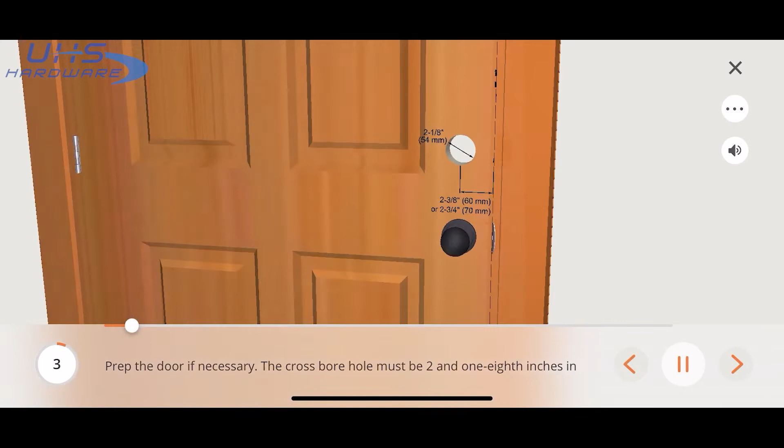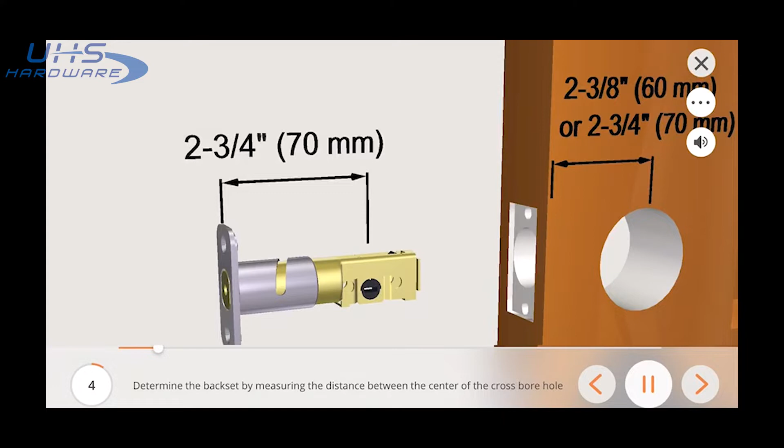Prep the door if necessary. The cross bore hole must be 2 1/8 inches in diameter. The edge bore hole must be 1 inch in diameter. The backset should be 2 3/8 or 2 3/4 inches. Determine the backset by measuring the distance between the center of the cross bore hole to the edge of your door. The deadbolt, J, has a default setting of 2 3/4 inches, 70 millimeters.

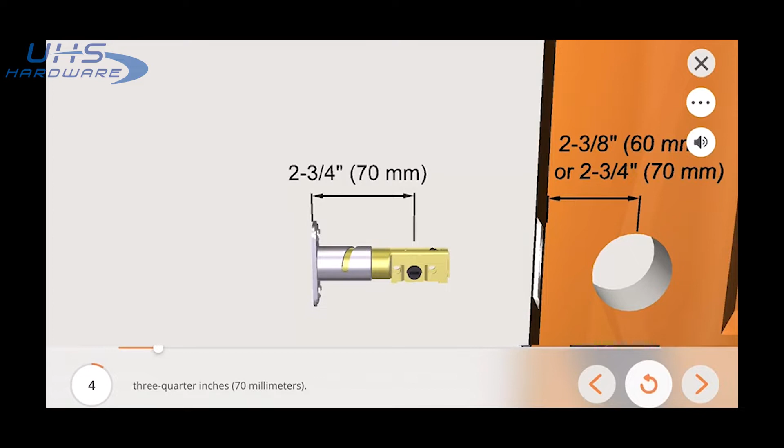If the backset needs to be adjusted, first extend the bolt by moving the crank towards the face plate. Adjust the backset to 2 3/8 inches, 60 millimeters, by rotating the bolt and the bolt face plate counterclockwise, and pushing in. Note, a flathead screwdriver may be used to turn the cam slot to extend the bolt.

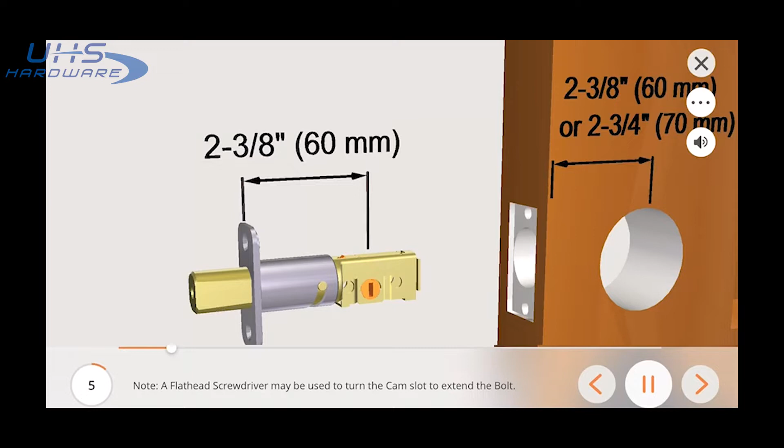Insert the deadbolt into the edge bore hole. Make sure that the deadbolt is right side up. Fasten it to the door with 2 screws, K.

Before you peel off the covers on the adhesive strips, check the exterior assembly alignment to your door hole and deadbolt. Before placing the exterior assembly on the door, make sure the torque blade is in the vertical position.

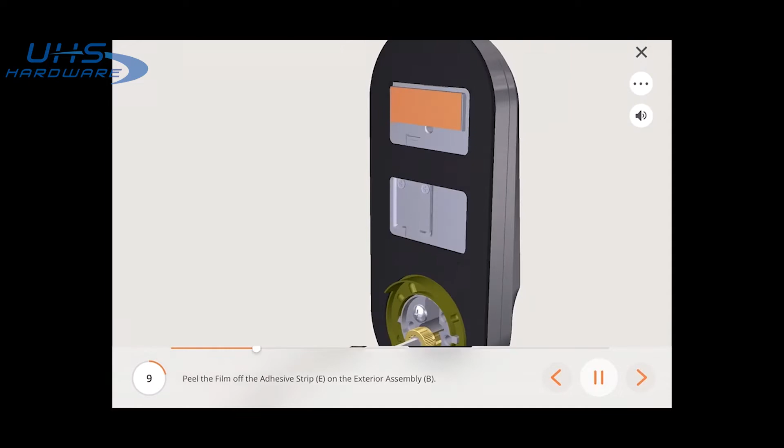Peel the film off the adhesive strip, E, on the exterior assembly, B. Make sure the deadbolt is extended. Place the exterior assembly on the door while inserting the torque blade into the vertical slot of the deadbolt and guide the cable through the cross bore hole under the deadbolt.

Check the mounting plate alignment to your door hole before you peel the cover off of the adhesive strip. Peel the film off of the adhesive strip, E, on the mounting plate, D. Place the mounting plate on the interior side of the door. Guide the cable through the opening near the bottom.

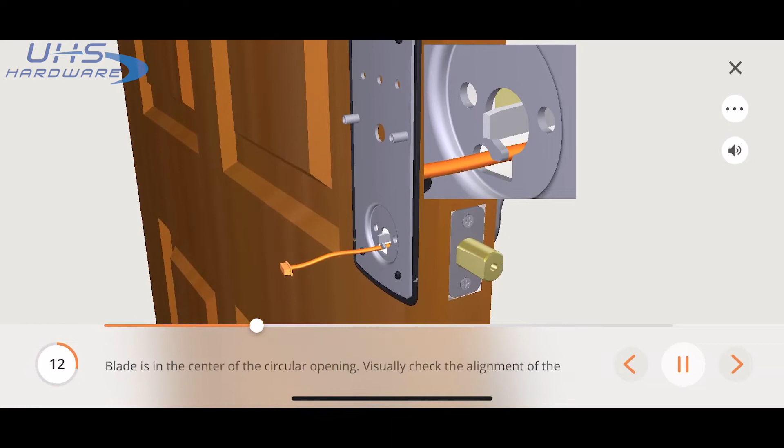The mounting plate should be placed such that the torque blade is in the center of the circular opening. Visually check the alignment of the mounting plate through the screw holes on either side of the circular opening. Route the cable through the slit connected to the circular opening.

Without using any tools, insert 2 screws, F, into the holes on either side of the torque blade. Carefully turn the screws by hand clockwise to catch the threads correctly. Turn the screws counterclockwise and make sure they are not cross-threaded and turn smoothly. Repeat if necessary and use caution.

Once the screws have been inserted correctly, make 5 turns clockwise by hand. You may now tighten the 2 screws, F, until the exterior assembly and mounting plate are secured to the door.

After securing the mounting plate, use the keys, A, to ensure the deadbolt locks and unlocks smoothly without any binding. Do not forget to take out the key before the next step. Note, leave the deadbolt in the locked position before removing the key.

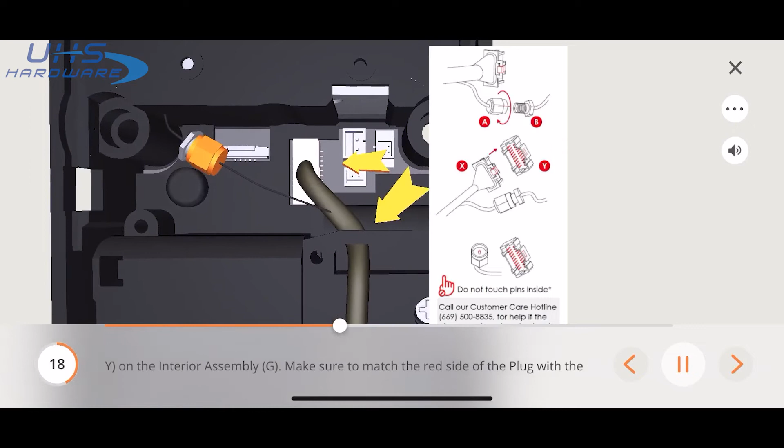Tightly insert the larger cable, X, coming through mounting plate, D, into the socket, Y, on the interior assembly, G. Make sure to match the red side of the plug with the red side of the socket as shown. Tuck the cable under the eyelet hooks and route to the right of the interior assembly, G.

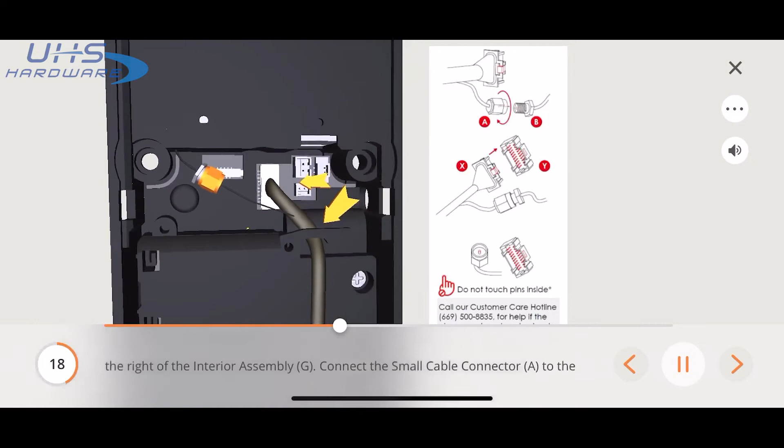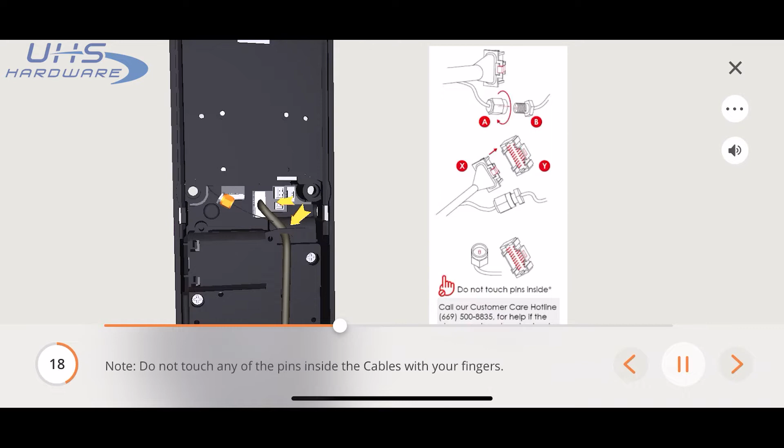Connect the small cable connector, A, to the small cable connector, B, by tightly screwing them together by hand. Note, do not touch any of the pins inside the cables with your fingers.

Place the interior assembly up against the mounting plate. Make sure the torque blade is inserted into the thumb turn. Secure the interior assembly to the mounting plate using 2 screws, H.

Place the ribbon and insert 3 included AA batteries into the inside row of the battery compartment. Press and hold the program button while installing the 4th battery until you hear a beep from the Lockly.

The keypad screen will start and initiate the self-check to determine if your Lockly is a left open or right open door.

Manually lock and unlock the door by using the thumb turn and key to make sure the deadbolt moves smoothly. If you feel like there is a tight tension while you are turning, it means that the lock may not have been installed straight. You will need to click here and go back to the step where you installed the deadbolt.

Swipe your hand across the touchscreen keypad, the lock will close. If the deadbolt bounces and unlocks automatically, it means the lock has been installed incorrectly without the deadbolt extended and with the torque blade inserted vertically. Click here to return to the step with the torque blade.

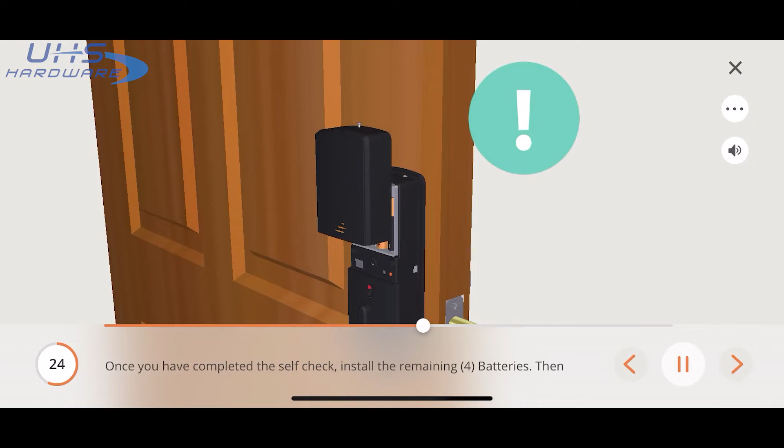Once you have completed the self-check, install the remaining 4 batteries. Then install the battery cover to the interior assembly and fasten the battery cover screw.

Make sure you have cleaned and wiped down the door. Remove the film from the back of the wired sensor, P, and attach it to the edge of the door. Once the sensor has been attached, close the door.

Before you peel off the film and place the sensor magnet, align the arrow to the arrow on the wired sensor. Note, the arrows must be aligned or as close as possible, less than 3/4 of an inch. Use the foam pads if needed to make sure the sensors are properly lined up.

Check the alignment by opening and closing the door. The Lockly logo should blink red when the door opens or closes.

After making any needed adjustment to the alignment, peel off the film on the back of the sensor magnet and install it onto the door frame. Complete the lock installation by securing the dust box, N, and the strike plate, L, to the door jamb using 2 screws, K.

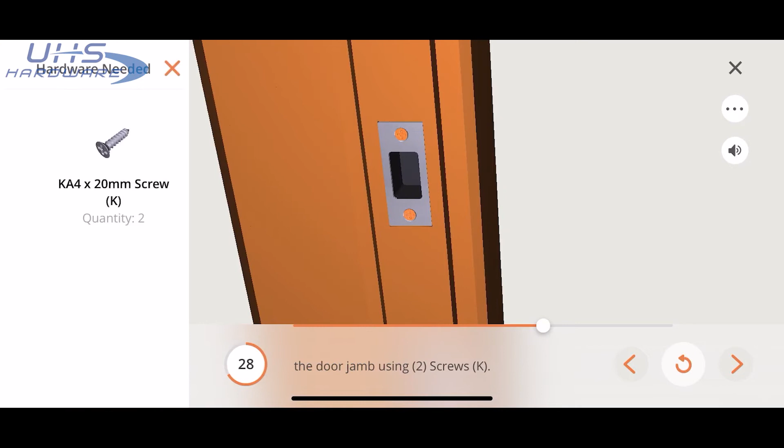Lockly Vision comes with a pre-paired Connect hub. To set up the Vision Connect hub, download the Lockly app on your smartphone. You will need to make the connection between the lock and the hub.

In the Lockly app, open the menu in the top left and select Set up a new device. Select the Lockly Vision from the available list of locks to set up and follow the step-by-step instructions for connecting the hub.

You will be prompted to scan the QR code at the bottom of the Vision Connect Hub or from the activation card. Follow these guidelines when choosing a location for the hub. Ensure that the TF card that comes pre-installed with the Vision Connect is properly inserted as shown.

Plug in one end of the included 1-foot LAN cable, S, to the nearest Wi-Fi router and the other end into the Vision Connect hub.

Plug in one end of the power cord to the Vision Connect, and the other end into the plug. Insert the plug into a wall outlet. Note, it will take 2 minutes for the Vision Connect to self-calibrate.

You are ready to connect the Lockly Vision to your smartphone with the Lockly app once the red LED turns on and the yellow LED starts blinking.

If you haven't downloaded the Lockly app yet, please download the Lockly app from the correct app store. After you have created an account, launch the app and select Set up a new device.

Once your smartphone is connected, check for important firmware updates or allow updates when prompted. Connect your Lockly Vision to your smartphone by adding a new device.

Please observe this troubleshooting guide in regard to the various ways the LED indicator lights may blink during setup.

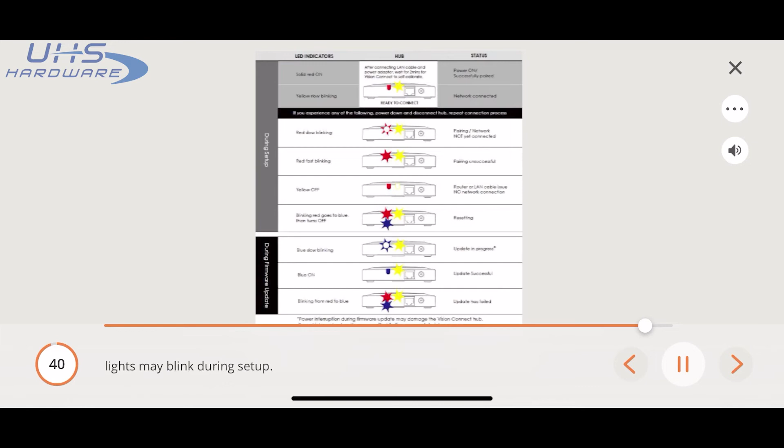Do not lose the activation card, V. Treat it like your driver's license, as it is the only thing you will have to identify ownership of your lock. Please store this card in a safe place, as this is required to set up your Lockly Vision.

The activation code will be required if you lose your smartphone or access code. Without this code, you will not be able to reset your lock. If you are missing the card, please contact us immediately.

Congratulations, this concludes the installation of the Lockly Vision Deadbolt.

The following steps will show how to connect your new lock to the Google Home app on your mobile device. To download the Google Home app, go to the Google Play Store.

Open the Google Home app and make sure you have added Google Assistant. Then press the Add button.

Press Setup Device. Press Have something already set up. Press the search button at the top right-hand corner of the screen.

Type in Lockly in the search bar and select the name of your Lockly model. Enter your Lockly account number and password.

When you have entered both your Lockly account number and password, press the Sign In button. If you want to enable voice control of Google Assistant, please confirm Yes and set the PIN code.